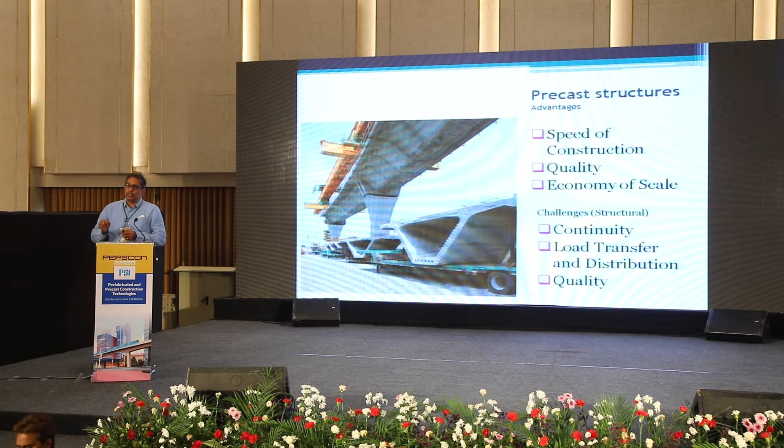These are two things that we really need to think through when we're dealing with precast structures. Quality, which is supposedly touted as an advantage, can become a big disadvantage, because we come to expect quality, but if quality is not delivered in terms of material or in terms of the precast element, it can come back to haunt us in performance. So performance becomes very important, and we have to put our foot down on expecting performance rather than these prescriptive measures we've been using so far. We have to master this.

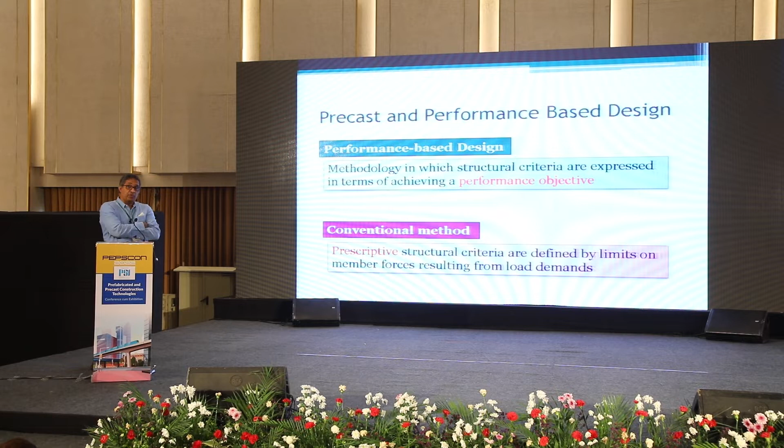So performance-based design, just to give a little background: what we've been doing so far is the conventional method, which is more prescriptive. We rely on strength, derive loads, come up with a demand, and design based on that. But now we are slowly moving towards performance-based design, where the structural criteria are based on achieving performance objectives. We want the structure to deliver a certain level of performance.

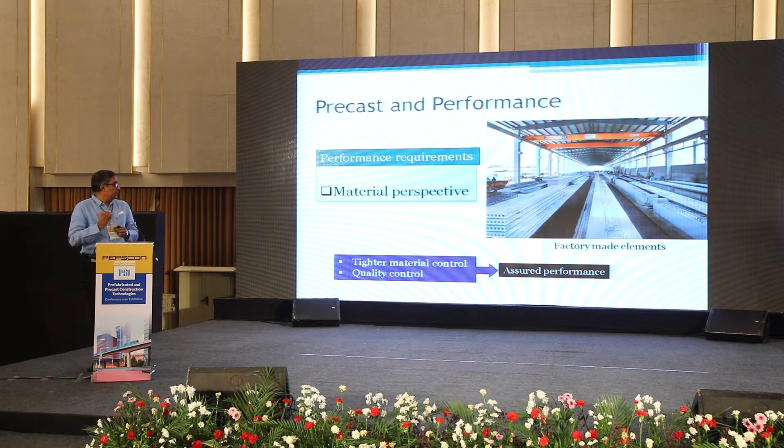Now in terms of materials, from a performance perspective, we get much tighter quality control and material control, so we supposedly get assured performance from the material. As a side note, IS 456, our Indian Code of Practice, is now moving towards performance-based design for materials. Gone are the days when we would do concrete as a 1:2:4 mixture.

Looks like I'll be competing with this. Yeah, that's tough to compete against. Okay, let's give it a shot again. It will be tough to compete with this. It's almost like a punctuation in my sentence—I'll keep going in between.

But now, as I said, codes are moving towards performance, and this is coming even in material design. IS 456 is being revised. Now concrete will be produced for specific targeted performance, not just strength, but performance in the long term. We will target specific durability performance for an assured life from the concrete. So this is already happening on the material front.

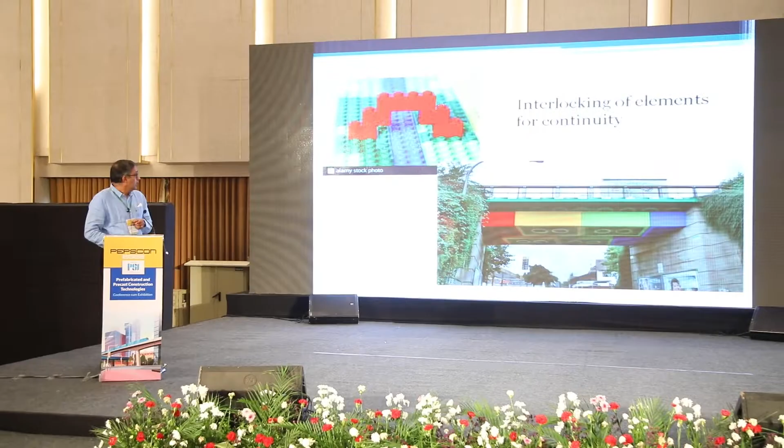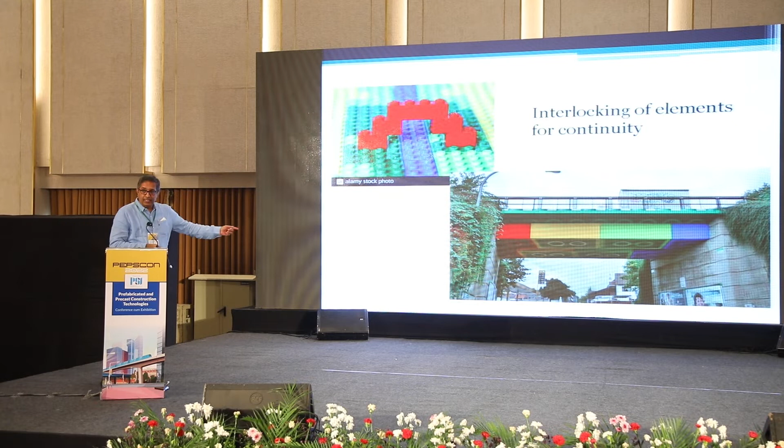So this is just to re-emphasize the point—we've all looked at Lego. We have these individual pieces, and unless we click them together, it doesn't form a continuous structure. Incidentally, this is a structure built in Germany that essentially looks like Lego, but it's made out of concrete. Just to show that we're dealing with something of this form, where individual elements have to be clicked together—they have to be bonded together to make a structure.

So in the next few slides, I'll talk about these building systems. We've already had the introduction to this. I'll primarily focus on the load path and the role of joints and connections.

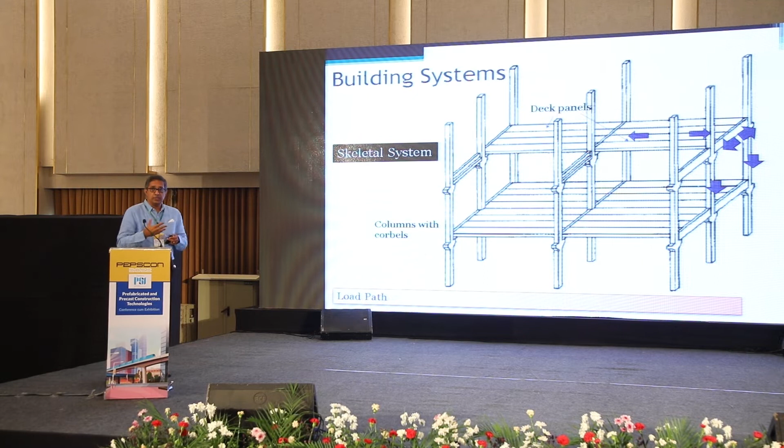Now, of course, we have these skeletal systems. We were already introduced to this. We are talking about beam column systems, and we can have the slab itself, which can be cast in situ, or we can have individual panels.

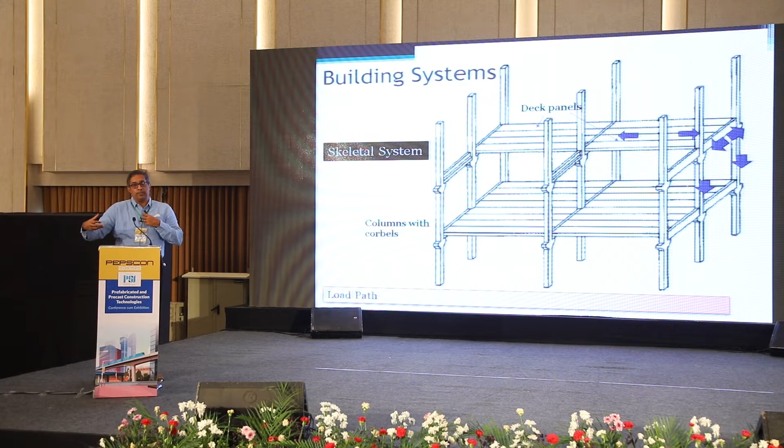Now, the question comes to if I apply a gravity load, the typical conventional gravity load path that we look at is that the load goes from the slab to the beam to the column and eventually finds its way down to the earth. Now, an example of a skeletal system, this incidentally comes from the FIB state-of-the-art report, and you can actually identify the different elements that are there.

You can clearly see, in fact we saw in the earlier presentation, you have the beam with the ledge, or it's an inverted T-beam, which is supporting these precast slab panels, which is framing onto the column with the corbels. So the load transfer becomes very apparent. The load comes from the slab, it is transferred to the beam, and eventually through the corbel, it goes to the columns.

Now, this is rather straightforward, and of course we've also looked at the wall systems where we have walls which are primarily intended as the vertical load carrying members. We can integrate them with the slabs to create these boxes which basically are quite stiff, and we can use that as our load carrying system.

Now, that was the easy part when it comes to the gravity load. It's when it comes to the lateral loads that we have to put our thought into it, because now when we are talking about a horizontal load, something that is being applied to the structure laterally, we really have to be clear about the way this load transfer takes place within the structure. So we have to look at how is the load flowing within the structure.

And in the case of a frame system, we are relying on the frame to basically, through the frame action, be able to carry the load action. Now, this is rather pedagogical, and when we have a frame that is assembled with multiple units, we can actually look at how the gravity loads, what kind of load actions are produced in the members because of these gravity loads.

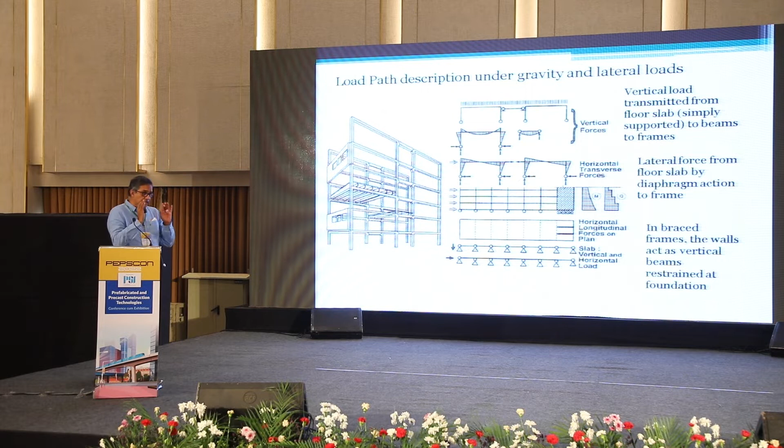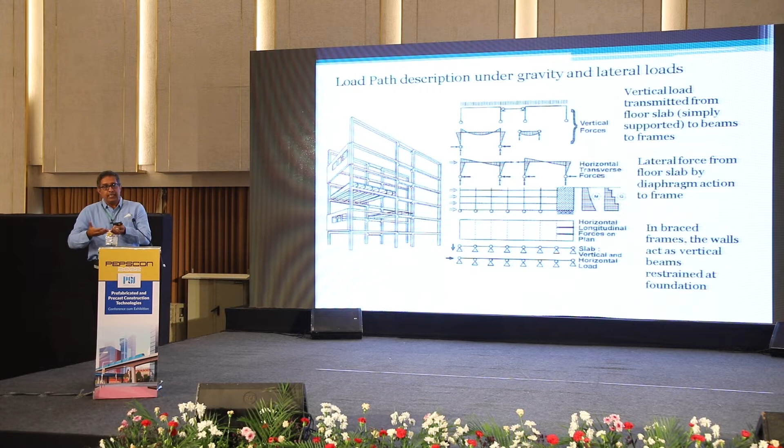And then the slab itself acts like a diaphragm, and of course then we have to ensure that the diaphragm action of the slab is maintained so that it is stiff in its own plane and is able to distribute the forces to the members, to all the vertical members in the building.

Now, this is the most critical thing, is when we are trying to do this analysis, ultimately we need to analyze the structure for what are the member demands. And for that, I need to come up with an idealization, and that is I rely on a model.

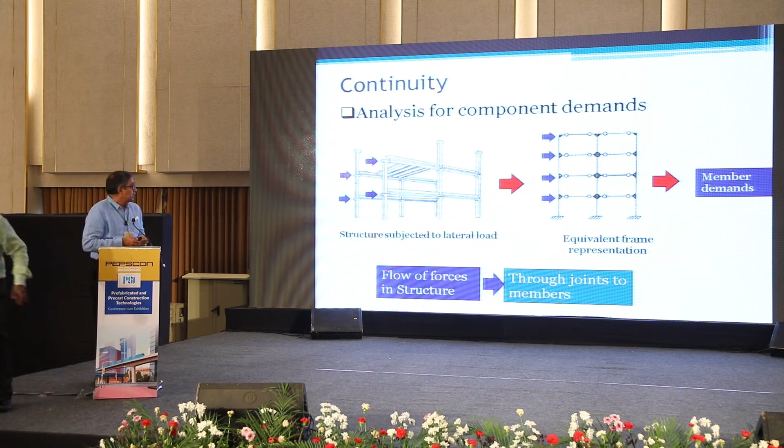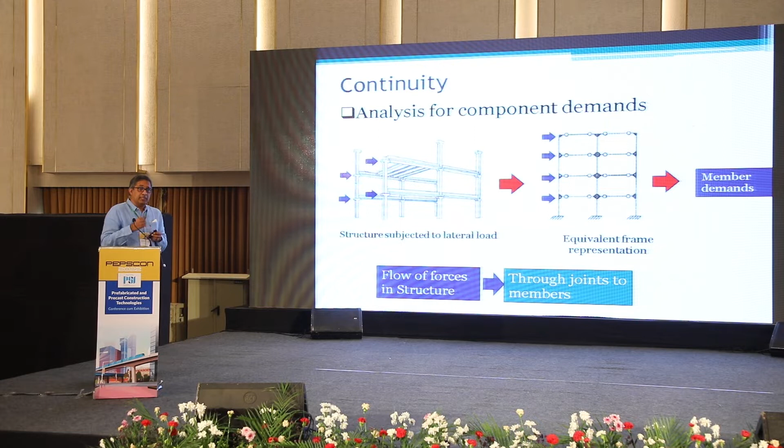And building a model for a cast in situ structure is relatively straightforward because you assume the joint is rigid. So we rely on the stick model where the beams and columns are modeled as sticks, and we do the analysis. But this becomes a bigger challenge when we're dealing with precast structures.

Because as I'll show in the next few slides, the joint itself can have different levels of continuity, and that has to be modeled accurately, otherwise I'll end up with a different representation of the structure. So at some level, I have to look at the real structure, come up with an equivalent frame representation or some equivalent model representation, which I will analyze to get the member demands.

That allows me to do two things. One is to design the individual members and also design the connections. So basically the flow of forces in the structure takes place through these joints, and these joints become critical in the structure.

Now, if you look at the flow of forces and continuity in the structure, there can be different levels of continuity for a certain load effect, and that determines the member forces I would be dealing with. So the level of continuity at the joints comes into play, and this is something I need to address and also model to determine the member demands.

When I talk about levels of continuity, this distinction is very nicely presented in the FIB state-of-the-art report, probably the most concise of all reports I've seen. They make a distinction between a connection and a joint. A connection is where you have two structural elements with two different types of load actions coming together.

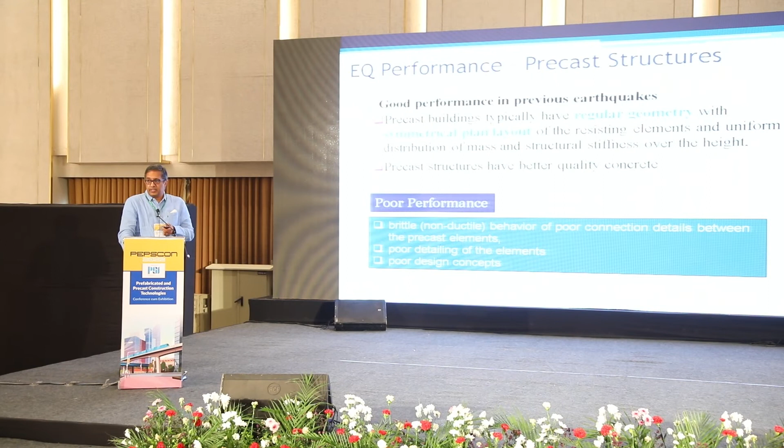So why is this horizontal force important? Primarily from earthquake and wind. Our previous experience from precast structures and earthquakes has been mixed. We have had very good performance in earthquakes, the precast structures performing very well, and fundamentally they should.

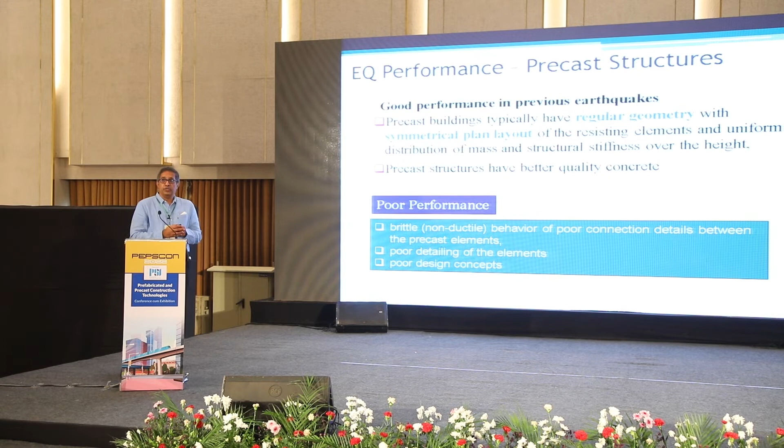Those are the kind of structures that we build with precast, so they have a very uniform distribution of mass and stiffness elements. So they would actually behave very well under lateral loads. And these typically have better quality concrete. So there's no reason for these structures not to behave properly.

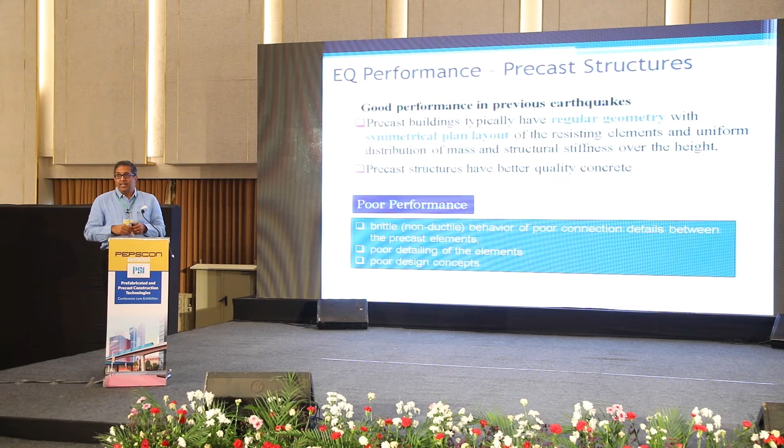Where they have performed poorly is because of brittle non-ductile connections. So the Achilles heel of precast structures is the connection. If we can design and detail the connection properly, if we understand what load transfer is taking place at the connection, then we know how the structure is going to behave and make adequate provisions for accommodating whatever is expected when it is subjected to an earthquake force.

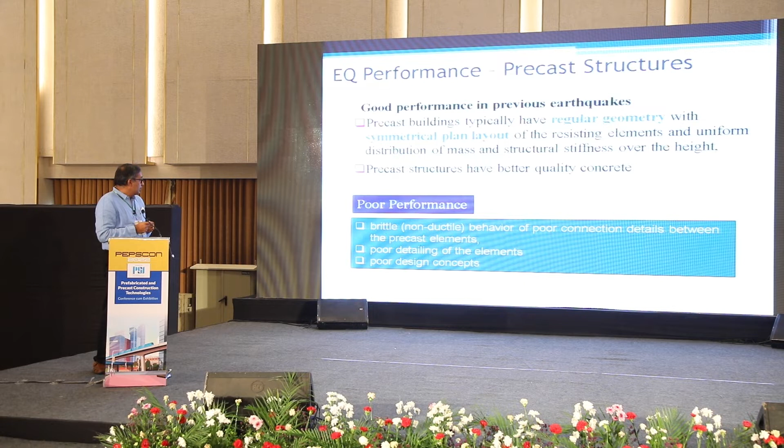Poor detailing of elements has been reported as a cause, and poor design concept, where the designers have not visualized what would be the load flow within the structure when it is subjected to horizontal forces.

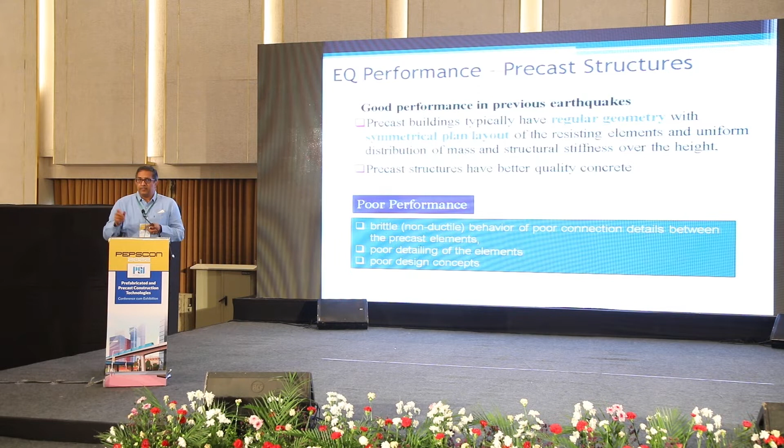So again, when we come to the design of a precast structure, we have to be able to visualize the flow of forces. We have to be able to design the joints, anticipate the kind of continuity that we want, and prepare the elements to carry the kind of demand that is coming their way.

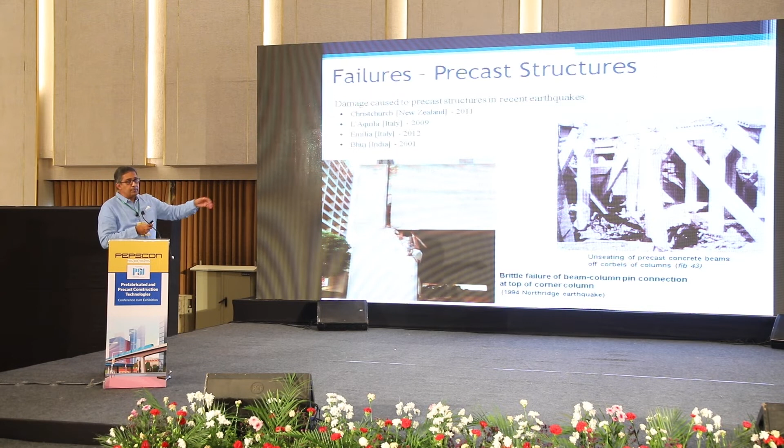So just some photographs, and invariably you would see that it is the joints that have failed. The structural elements have simply been deseated, or uprooted from the connections, and fallen off. More photographs from near here.

So for lateral load response, what we need to do is understand the failure of joints and be able to address this progressive collapse. This happens when failure occurs in an isolated part of the building, and the load redistribution happens, but the remaining members in the structure are not able to handle the redistributed load.

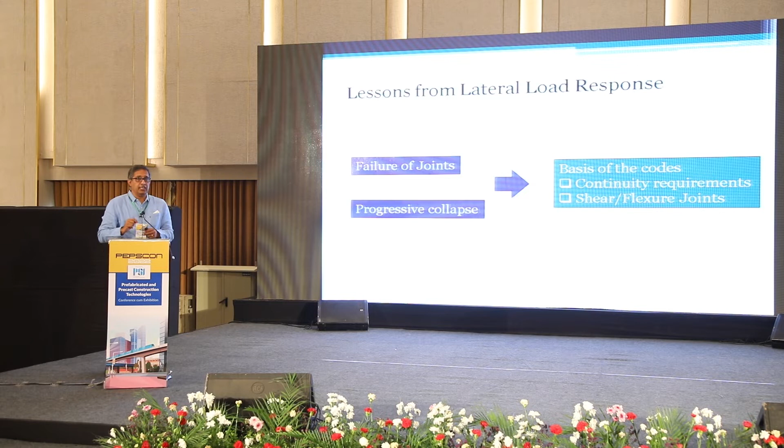So this is something that we need to be able to address, particularly for precast buildings, and sometimes this becomes an issue during construction, not just after. During construction is when the precast building is at its weakest - we have not yet assembled everything, all the units are not tied together, and these individual elements still don't act as a unit with all the other elements.

So we can potentially run into this progressive collapse during construction, but this also has to be addressed later during an earthquake event. The basis of most of our codes is the same thing: continuity requirement. We have to make sure the elements are continuous, and handle shear and flexure at joints. How do we take care of this shear and flexure at joints?

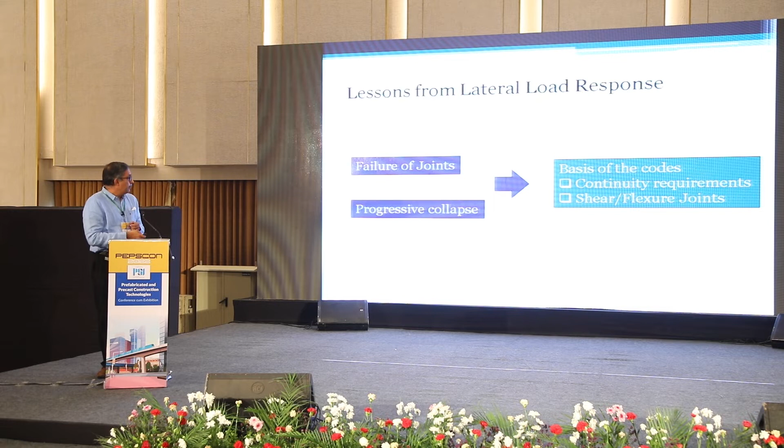There are different joints given, different methodologies proposed, but the fundamental principle is straightforward. What we rely on is: suppose there is a horizontal force, suppose there is an earthquake - now we rely upon the nonlinearity that is generated at a few locations. So we pre-identify those locations where we expect the nonlinearity to develop, and typically these are identified with flexural hinges.

These hinges are supposed to form at predefined locations. The way we define the hinge is that it should be able to carry the load without much strength degradation over a long displacement. So that is the whole idea of ductility.

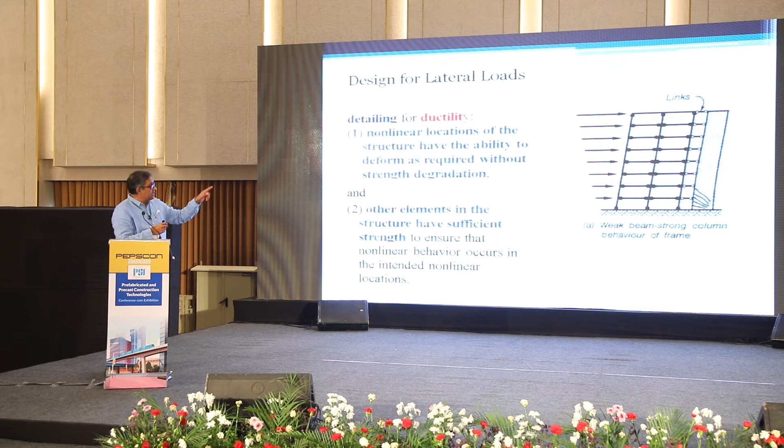We wish to have all our joints to be ductile. While these hinges are forming, we want to make sure the other elements are strong enough that they don't give way, and allow the hinges to form at predefined locations. Typically when we want nonlinearity and energy dissipation, we would ideally have it in the form of a flexural plastic hinge. That is the best way to dissipate energy.

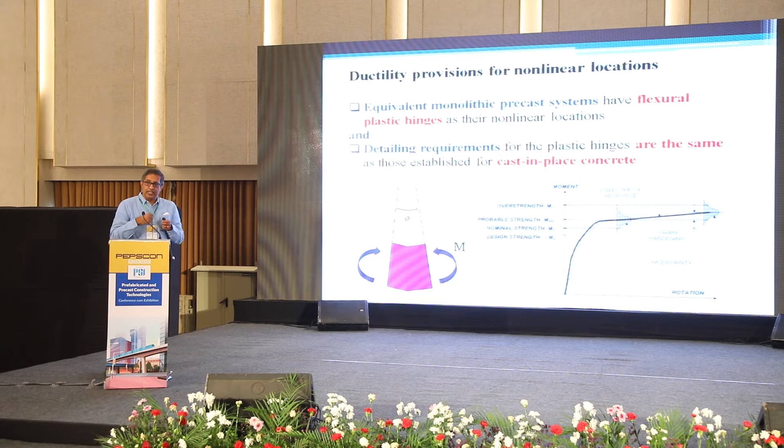Shear is not the mechanism we rely on. These plastic hinges are localized at the beam column joint. So that is the key. Even for reinforced concrete, that is where we expect our hinges to form.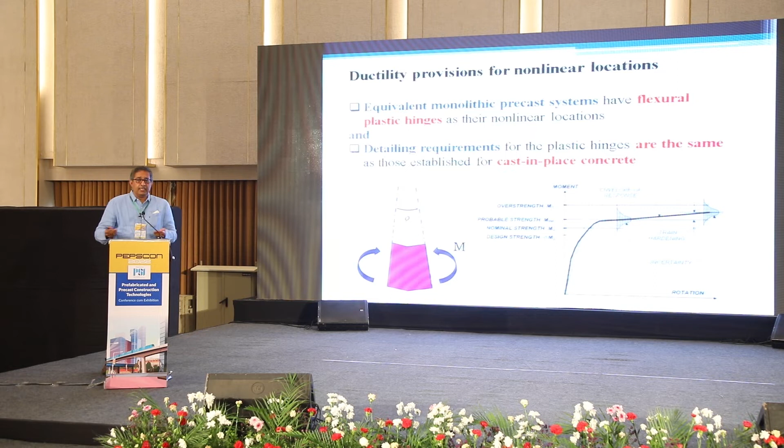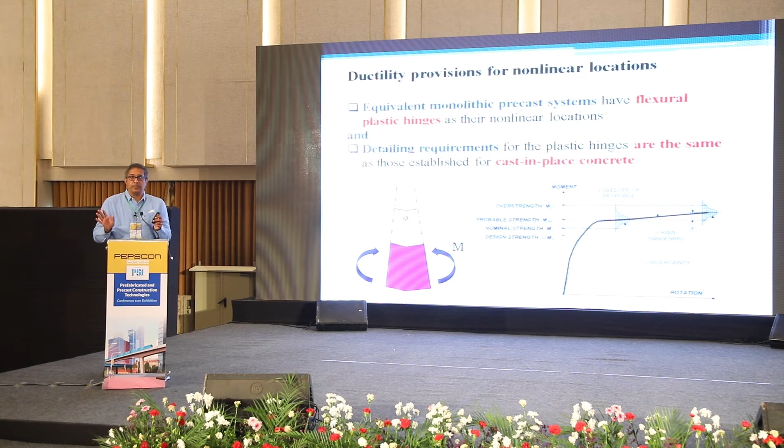When we're talking about precast connections, the detailing requirements of the plastic hinges would be the same as those established for cast-in-place concrete. This is the fundamental requirement of precast concrete: we expect precast structures also to form these hinges, and the requirement would be the same as for cast-in-situ concrete.

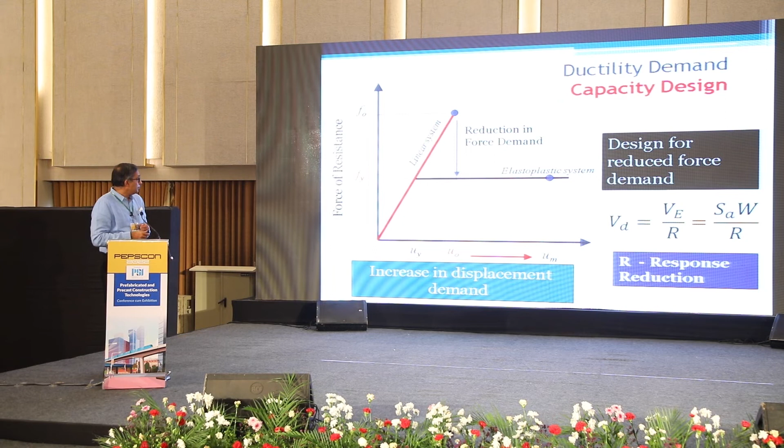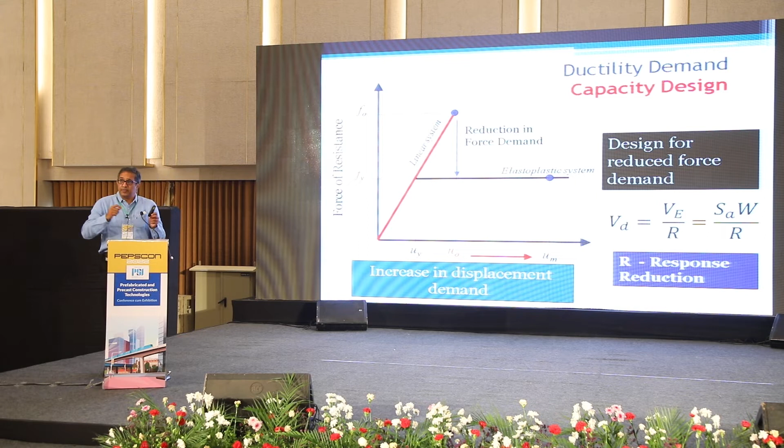The basic understanding is when we look at the lateral response of a structure to a horizontal force, we rarely design a system to be linear elastic up to failure. These are systems of limited or no ductility. We want structures to be ductile, able to deform, and we design the structure for reduced capacity, assuming it can deform a lot. We use the response reduction factor, and the entire concept is called capacity-based design.

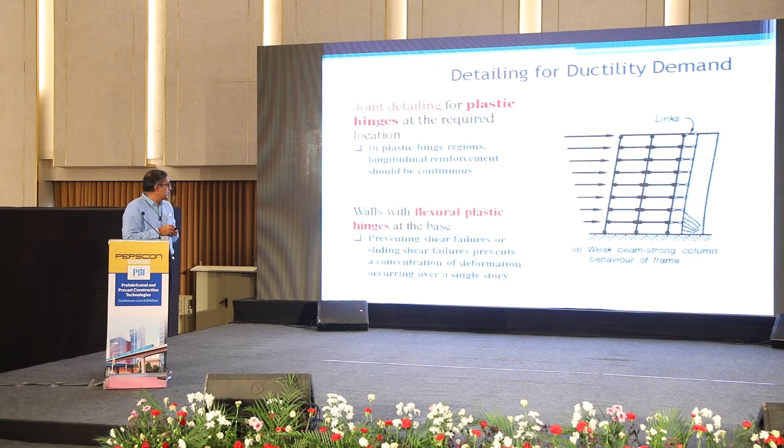One thing to realize is that the response reduction factor itself is a complex combination of multiple factors, including ductility, strength, damping, and redundancy factor. These are built into the codes, and we come up with different factors based on the expected ductility from the system. So when it comes to detailing for ductility, we are requiring that all plastic hinges should

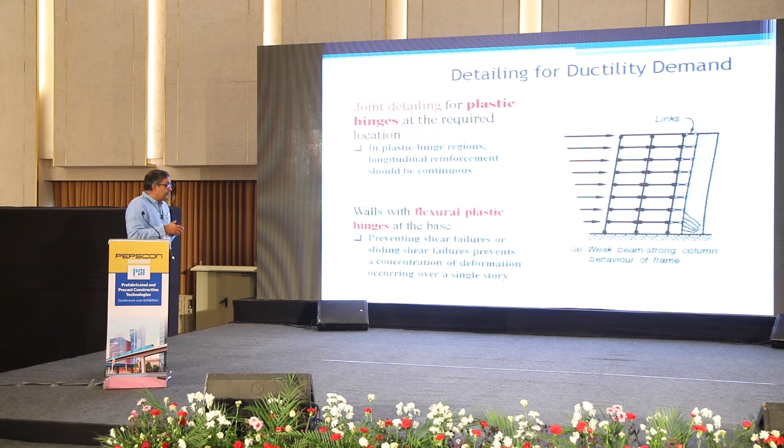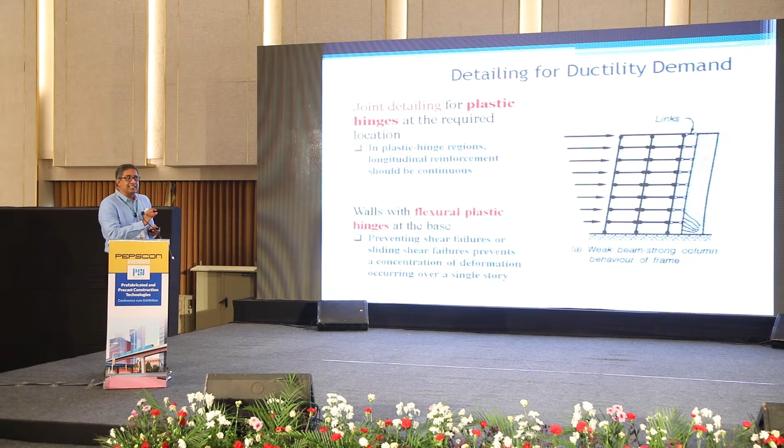form at predefined locations, ideally in the beams or at the beam column joints. For our precast structures, we would want the longitudinal reinforcement to be continuous across - I think that was also presented in the previous talk. We would want the tensile reinforcement, both top and bottom, because we may have moment reversals, to be continuous across the joint.

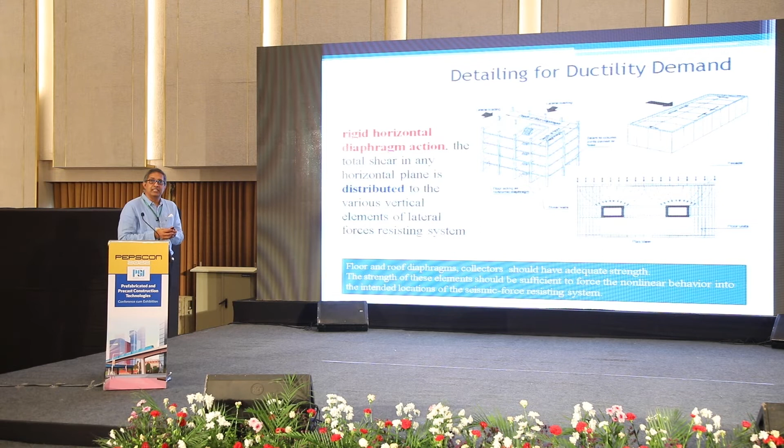When dealing with the wall, ideally we would want a flexural plastic hinge to form at the base. We don't want shear failure in the wall, because that would lead to localized deformation or a story shear, which is highly avoidable.

When detailing for diaphragms, they should be able to collect the forces and transfer them to all the vertical elements. That is the requirement of the diaphragm in this entire building system.

The fundamental thing in this capacity design is we have an estimate of the time period, which we use to estimate the demand, usually an empirical formula relating it to height. When dealing with regular reinforced concrete structures, this often leads to an overestimate - the time period we get from this formula is usually much smaller than the real time period of the real structure, which leads to an over-design oftentimes.

But in precast structures, because they're inherently stiff, this formula actually does a pretty good job of estimating the time period, so it's not so much of an over-design. When designing precast structures, we really need to look at this formula if we're still going to use it as the basis for scaling our responses, because the time period we get is actually a quite reasonable estimate for precast structures, particularly for wall-based structures.

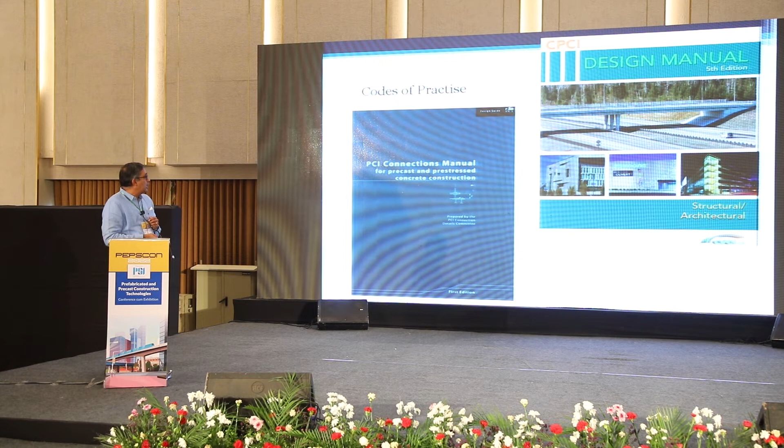Now, there are several codes of practice that you would see, and different manuals that are available. The PCI connections manual is a beautiful manual with different types of connections detailed, with detailed calculations on how to go about designing different types of connections. There's also the Canadian manual, and the FIB.

I think these are probably the most comprehensive pieces of work that I've seen. You have the FIB guide on connections and the state-of-the-art report, a must-read for those looking to get into precast, where the theory behind a lot of these things is explained in great detail in both these documents.

Then of course, we have recently in India introduced the code for prefabricated buildings. It was much overdue, a significant overhaul compared to what existed. This deals with prefabricated buildings, IS 15916, dealing with partially or fully assembled erected buildings with structural parts consisting of prefabricated individual units or assemblies. I'll just quickly go over the different provisions. I don't want to get into details, just to show that significant advances have been made. Of course, there's still several things that need to be done.

One, we now introduced this basic module, which was desperately needed, because if we are going to look at precast elements as manufactured products, we have to treat them with the respect of a manufactured product, and we need to introduce tolerance requirements. Now that modules have been defined, the tolerance requirements have been specified.

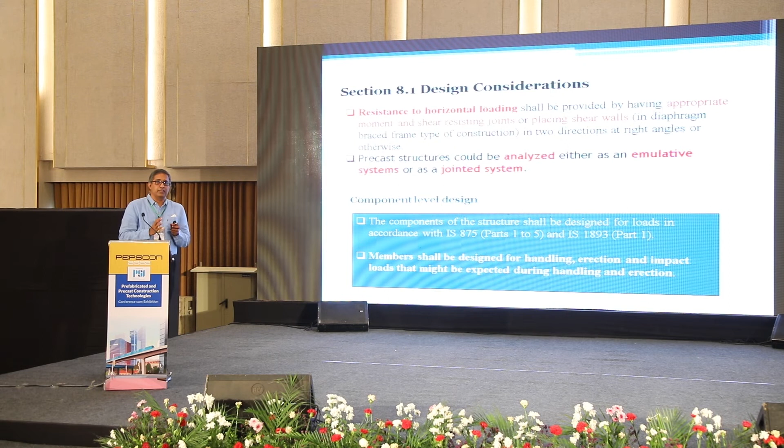Then resistance to horizontal loads is specified. It's provided that resistance to horizontal loads shall come from appropriate moment and shear resisting joints. So the joints play a key role, or placing shear walls in the structure. It says the precast structure should be analyzed either as an emulative or a jointed system, and we've already seen what those two systems are.

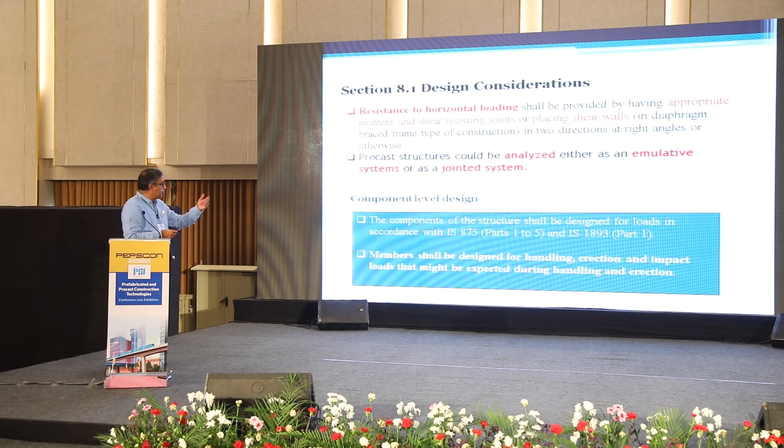But of course, the level of detail given on jointed systems in the Indian code is very limited. So although they talk about jointed systems, not much is described in the code on jointed systems.

The component level designs, everything, basically you are referred to loads, which refer you to other IS codes. And when we're talking about precast components, this particular code refers you to other existing codes on specific elements. So if you were to design hollow core slabs, it refers you to IS 10297 and so on. So there is now a good connection between this code and the other codes for other precast elements.

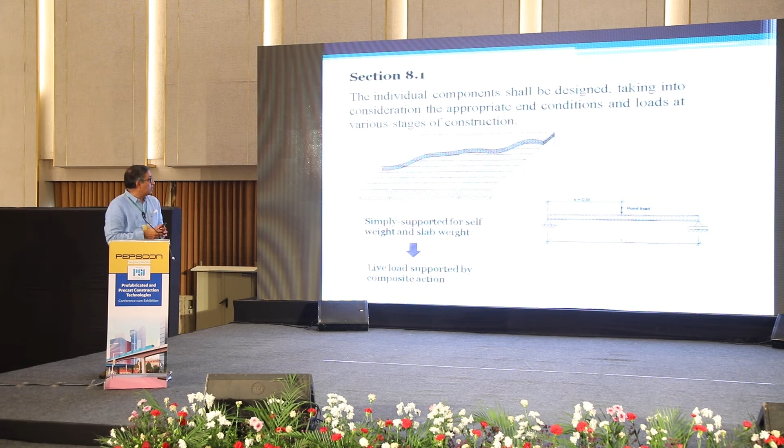Design and handling is something mentioned when talking about precast elements. The precast elements themselves should be able to handle the stresses during hoisting and erection. We have to account for the different stages of construction when we're talking about hollow core slabs. When we put the hollow core slab on a structure, it should be able to handle its own weight in a simply supported arrangement.

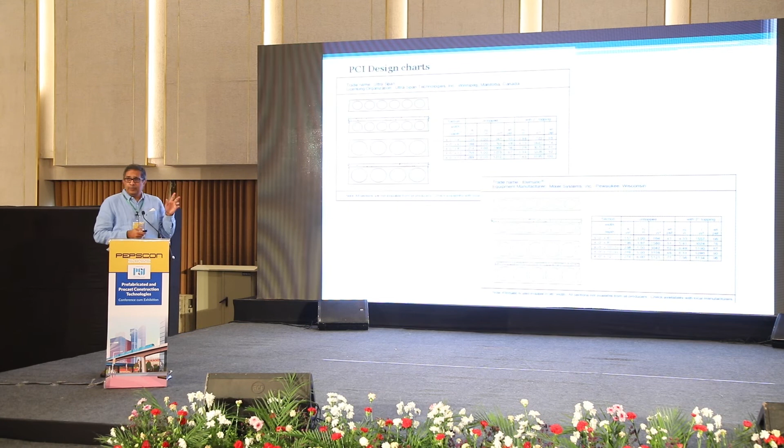But once we put a composite deck slab on top of that, the live load itself taken by this slab system would be taken in composite action. So the change in the action between a simply supported hollow core beam taking its own weight and the weight of the deck slab, and the live load and any other imposed load being carried in a composite manner with the deck slab, that has to be accounted for when we do the stress analysis.

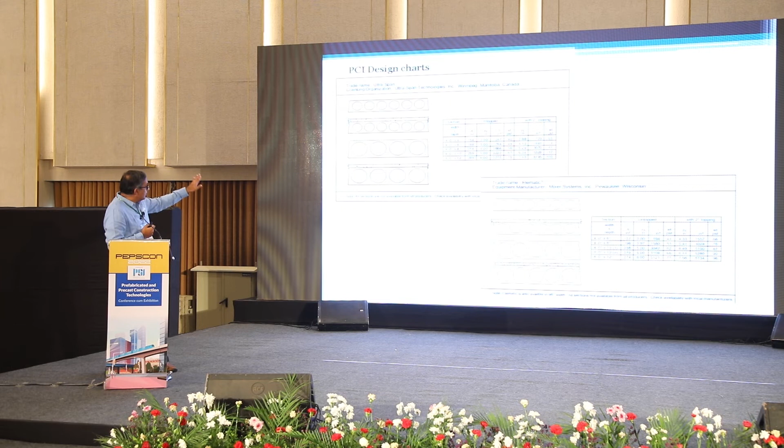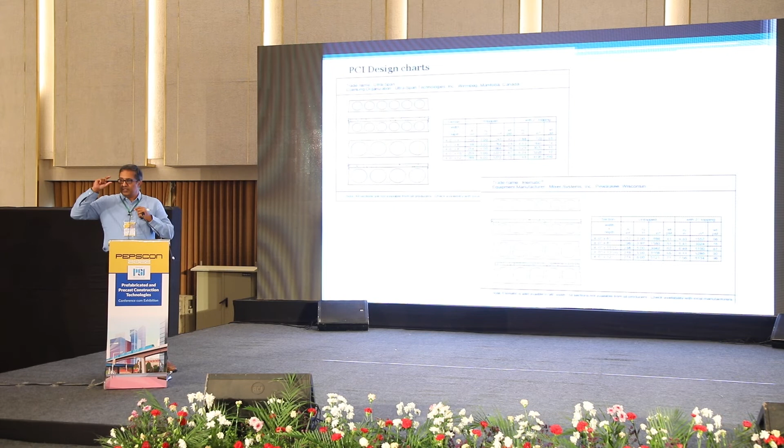Now I'm switching gears because this level of detail is not available in the Indian codes, and we don't have such design charts. I just wanted to show you that PCI has these design charts available, which are basically like cheat sheets, allowing us to decide on the spans required, the depth of the hollow core elements. These charts are available for different types of geometries.

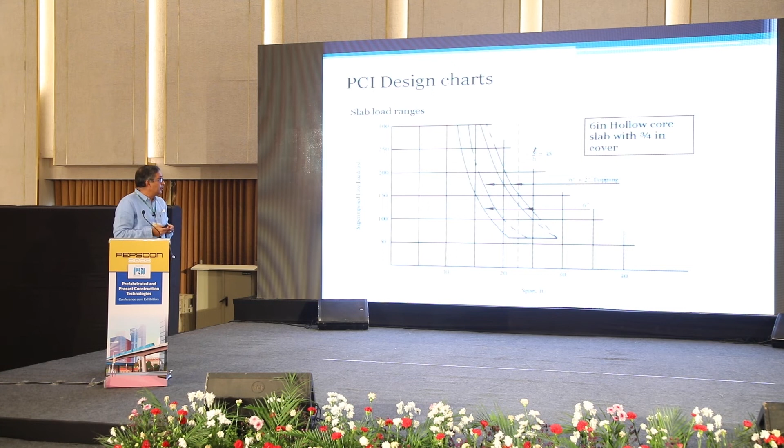Of course, these are all proprietary systems, but for these proprietary systems, we know exactly, if I have a certain span, I can simply look up the chart and decide what is the thickness of the hollow core slab I use for this particular span and for this particular geometry.

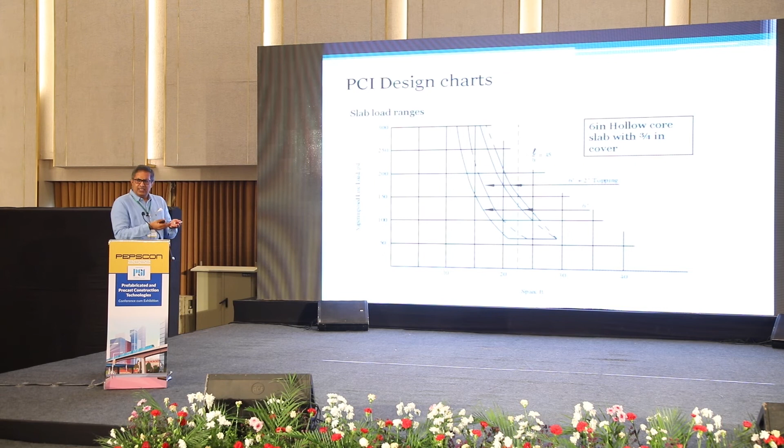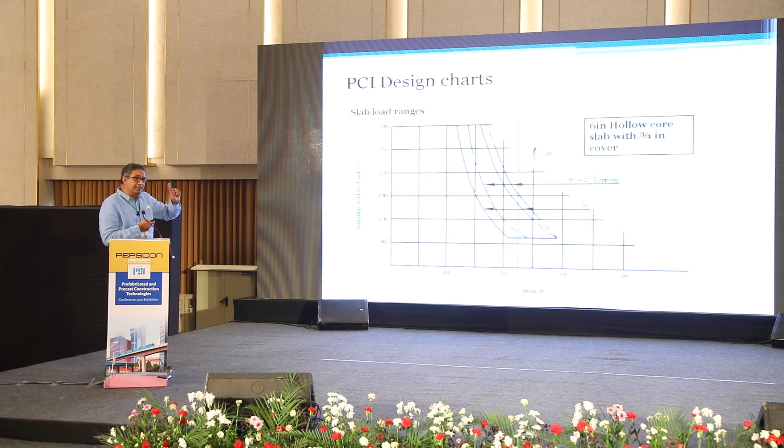And of course, PCI also gives us these nice design charts when we have, let's say, a composite system. So here for this particular 6-inch hollow core slab, if you look at the solid lines, that tells you the range for a given span and superimposed load, what span can you use for a given superimposed load. Once you make it composite, you move to the dashed lines, it moves to the right. Such charts are available that simplify designs, which of course, unfortunately, if one is to use the PCI design, one has to get used to the Old English units.

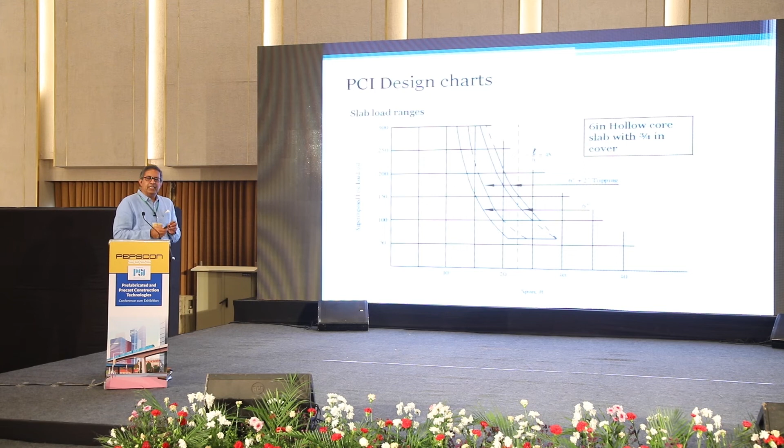There is a fundamental difference in design philosophy that people should be aware of. Our method of design is predominantly the old British method, whereas the Americans follow a different design procedure, notionally different when it comes to calculating nominal capacities.

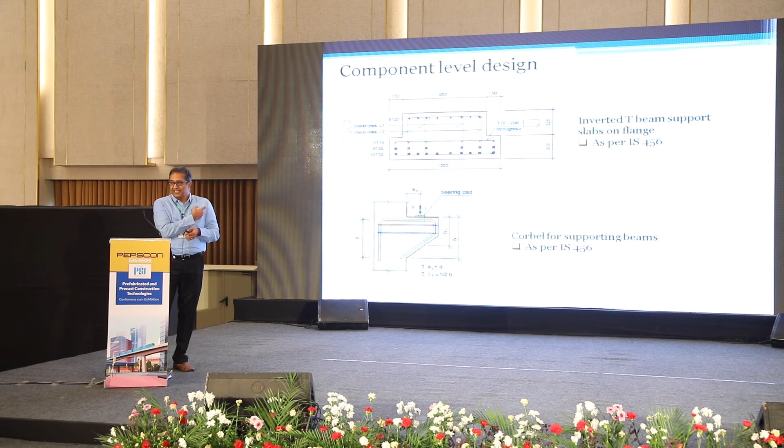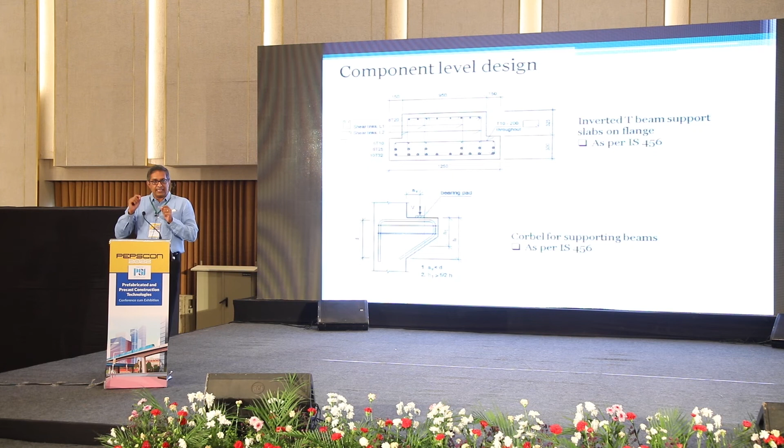When it comes to design of individual elements, you fall back on IS 456, but one has to get used to seeing these beams in a different configuration. Being an instructor, I always teach my students to design T-beams; it's difficult to tell them it can also be used as an inverted T. But this isn't just an exam problem, it happens in real life. The first time I gave such a problem in the exam, everybody thought I was out to trick them, but this is reality.

We do have inverted T beams that come into play when dealing with precast structures. And one has to get used to the corbel. A corbel is a nice element to have, but a high shear element, and it should be designed and detailed properly. This can turn into a weak point of the entire structure if not designed properly.

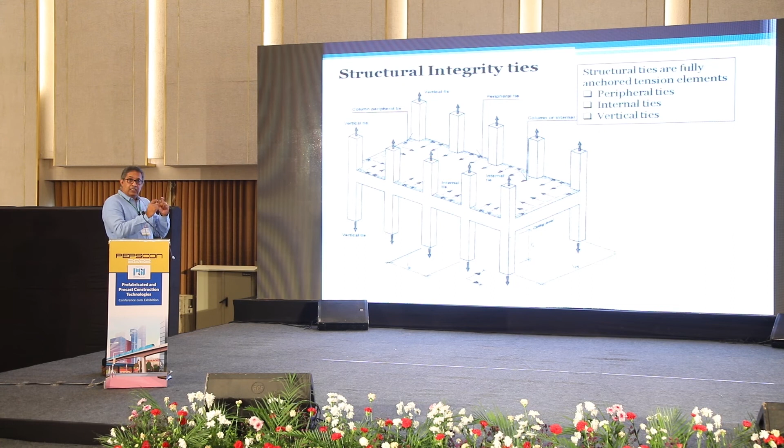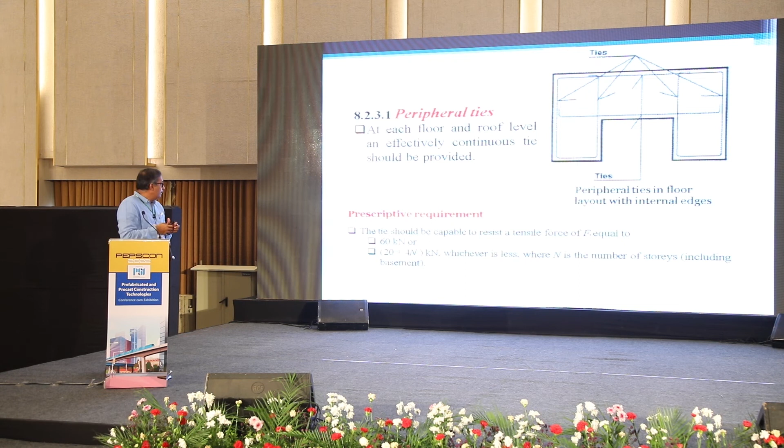The last thing I want to touch upon is continuity. When we have all these elements, it's not just that they're connected at the joints; we have to make sure the entire structure is continuous, and for that we provide ties in the structure. We provide ties in the periphery, which tie all the elements together, along with internal and vertical ties, like rubber bands holding the structure together.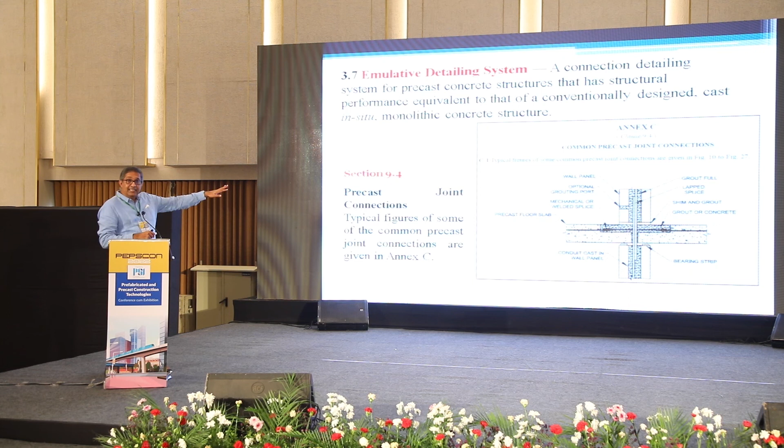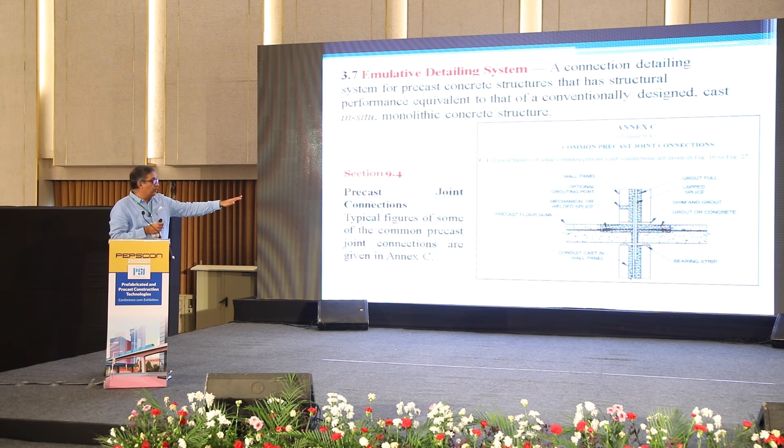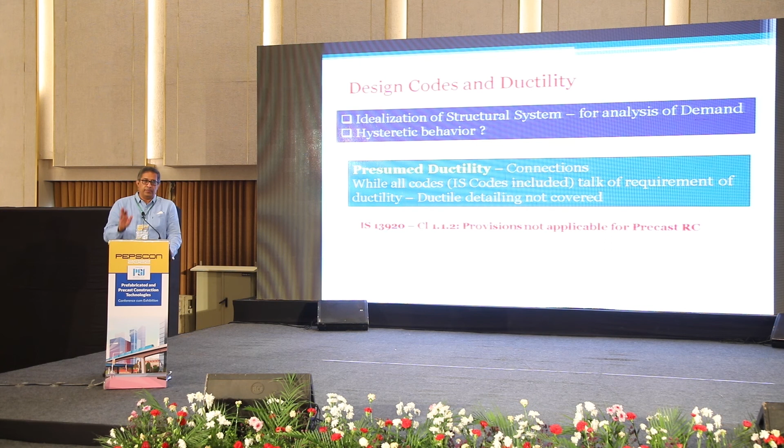Finally, we have this emulative detailing system. The code talks about connection detailing which is emulative, meaning we are connecting two precast elements, and the connection behaves as if it were made of cast-in-situ concrete. That is what we expect from an emulative connection detailing. A whole host of connection details are given in Annex C of the code. It is presumed that if I follow one of these levels of detailing, I am producing an emulative connection, but the actual fact needs to be checked.

That leads us to the final topic: ductility. For regular reinforced concrete structures, the procedure is straightforward - we design as per IS 456 and detail as per IS 13920, which assures adequate ductility. That link is missing for precast elements because we presume ductility of our connections, but when we do a connection, we don't know the level of ductility available. While all codes talk about the requirement of ductility, the exact ductile detailing requirement for precast is not exactly covered. This is one of those gray areas where we presume that following the code and doing an emulative connection achieves not just the strength but also the level of ductility required.

For surviving an earthquake, it is ductility that is important - I need my structure to remain ductile. That is still a gray area with precast structures, specifically the connection and the level of ductility achieved with these different connections. With that, I'd like to conclude and thank you for your attention.